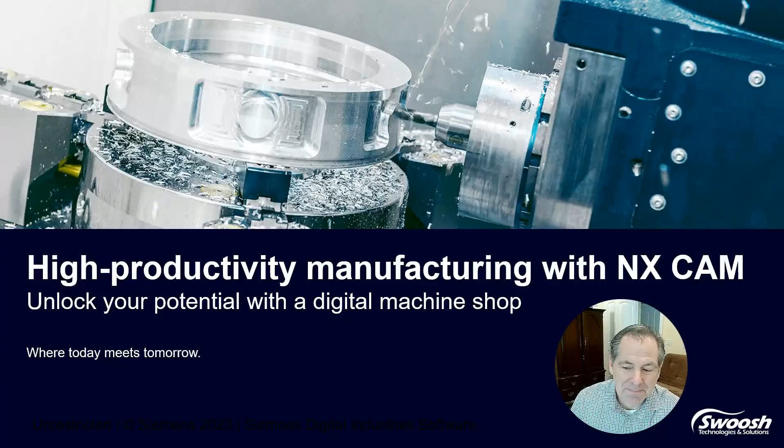So our agenda today is, we're going to cover CAM as your manufacturing platform. For those who already have NX CAM, some of it may not be new information, but my hope is that when John runs through some of the newer solutions on the platform itself, you're going to see, hey, that looks different. How can I leverage that? But we're going to cover three areas deeply today: probing, turning, and feature-based machining.

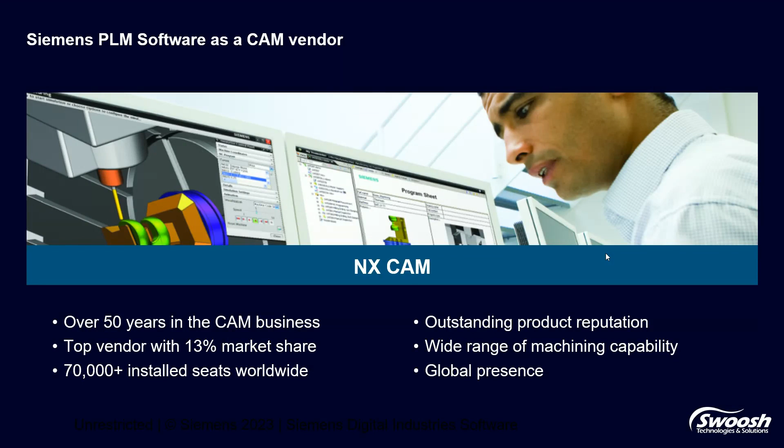That's where we're being pressed really hard by our clients today: how can we do more on the shop floor? So Siemens has been in the CAM business for 50 years, so they have a pretty big footprint worldwide. What do recognized consultants like CIMdata say about NX? One of the strongest product offerings in industry today. So with 13% of the market share, in a very segmented market, that's a really big footprint.

So areas where we excel, and when I say excel, I mean we are one of the leaders, for not only ease of use, but for speed, time of programming, and getting accurate information, the correct information the first time for the shop floor. So that's things that we will try to highlight today, but once again, everyone is trying to do more with less people, and sometimes the people don't have the same knowledge as other people. So how can I capture that? We're going to show you a little bit of that today on the feature-based.

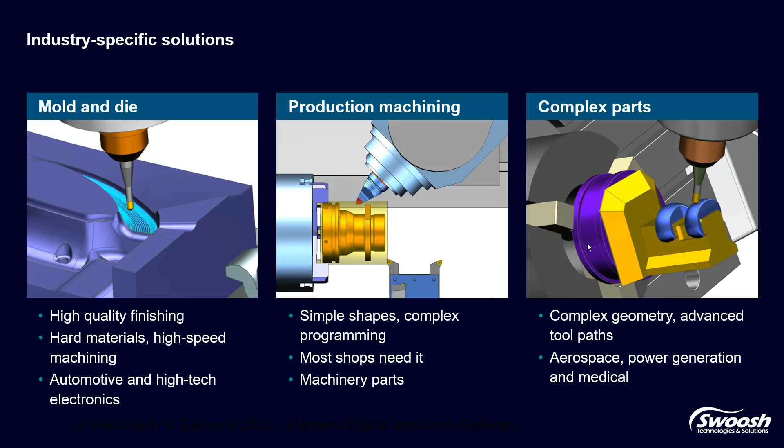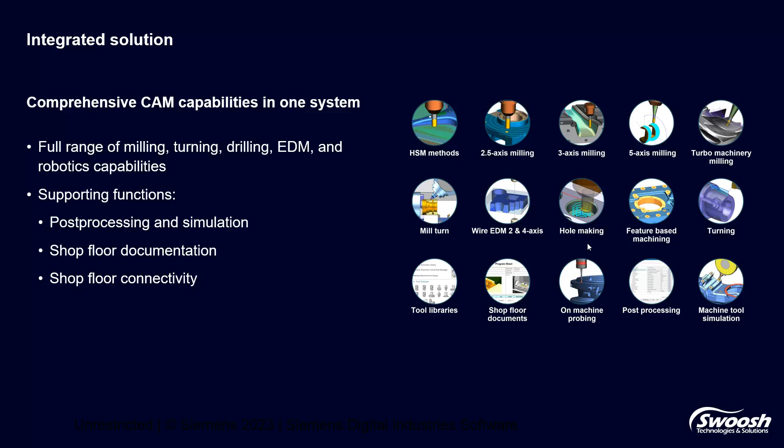So we are an integrated solution. We're not going to show you all these today, but it's not just fixed axis machining we have. We have a comprehensive solution from the post-processing, the simulation, on the shop floor. What information do the users and the operators see, and how can they communicate? So these are really areas that are critical for manufacturing today, the communication aspect of it.

Areas where we excel using some of our capabilities with NX CAM: anything with complex cutting, complex machines. This is where we actually coexist with a lot of other solutions where the other solutions can get it done, but it's a struggle, so they bring in NX CAM.

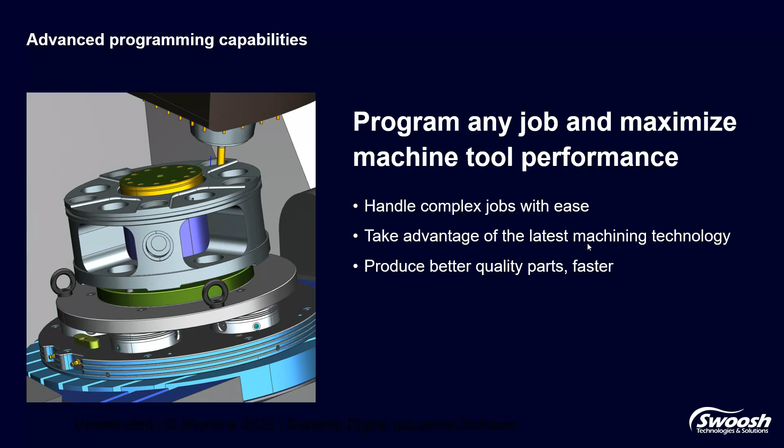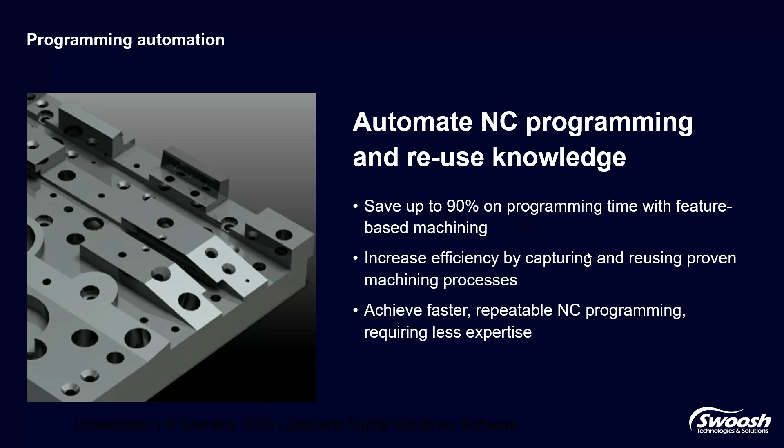Program automation. You're going to see this today. A lot of people talk about feature-based machining, but Siemens has taken it to a new level where it can capture best practices, where you can build in the knowledge of people who have been there for a while. How do you do things at your shop? So this is where Siemens can get crazy numbers, like 90% improvement on programming time based on their feature-based applications. Program automation further with PMI.

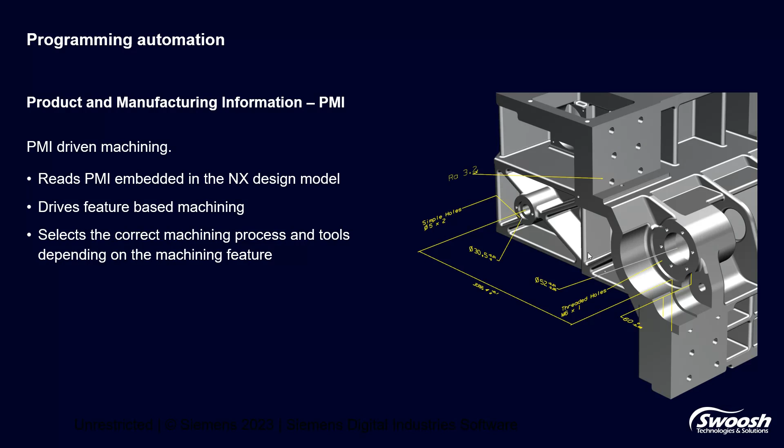So for those who do any kind of engine build or are in the supply chain with any kind of aerospace, you have seen PMI. It is only going to get more prevalent as the days go by. How do you leverage that in your process and your workflow? How can you capture that to program more accurately and more efficiently?

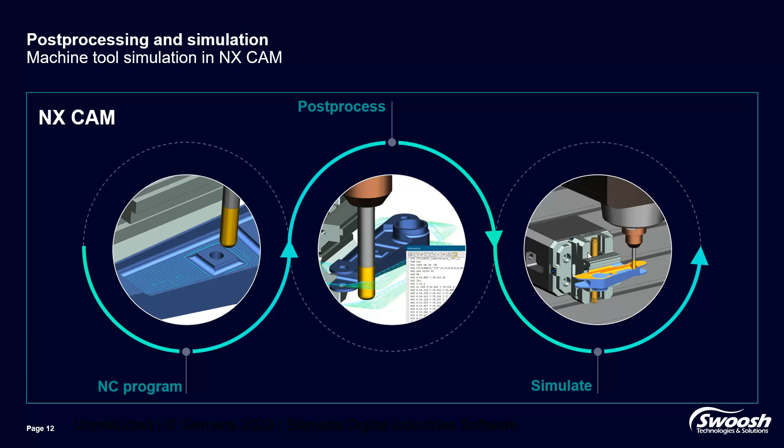Post-processing and simulation. We wouldn't be a comprehensive solution if we did not have a complete solution for communicating with the machine tool on the shop floor. So not only does Siemens simulate, we can also emulate. So we emulate with NX, and we can actually simulate with the machine controller itself, so you can do 100% virtual commissioning. What you see is what you get before you cut. You're going to know for certain.

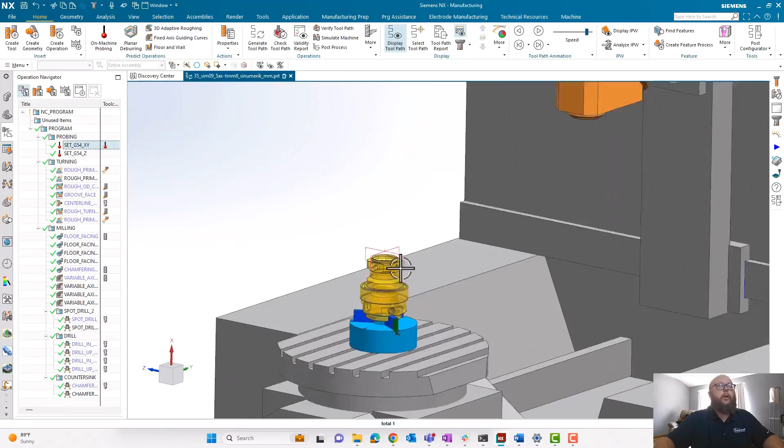Starting at the very top, we'll see that we have some probing operations. And in this case, it's nice to see that inside of NX, we can go ahead and probe our parts, in this case to set our work offsets. I could go ahead and display my IPW at any point in time and use the toolpath animation to view what our operation is going to be doing.

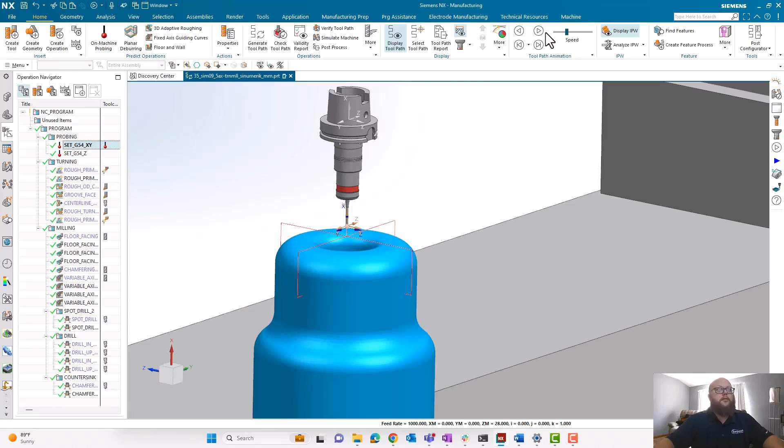In this case, I'm doing a 4-point probing operation of this boss feature. This is really going to set my X and Y location on my machine tool for this specific part, as well as—the next operation would simply be probing a Z position, again to set the location. So these values are going to set, in this case, our G54, which corresponds to the location I've set my G54 coordinate system in my geometry view.

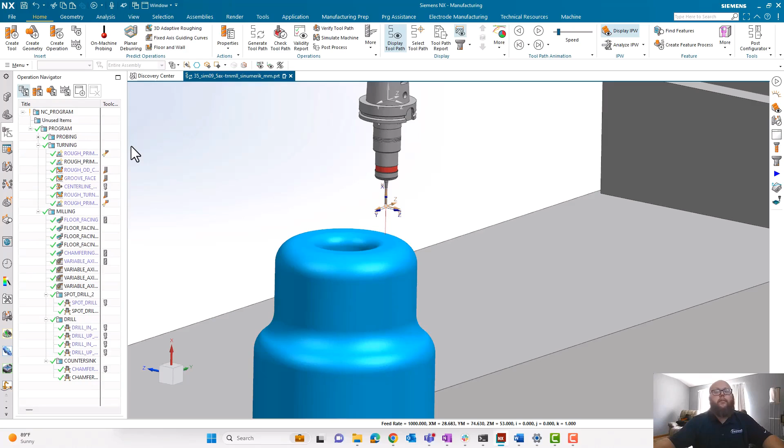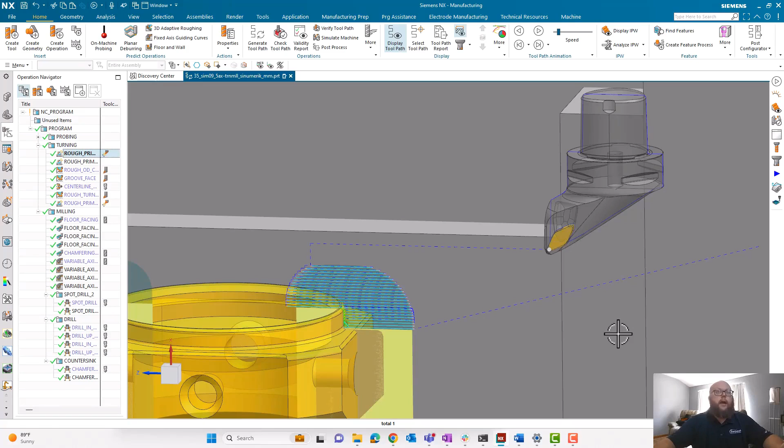Inside of turning, we support many different operation types. One of the newest is prime turning, a new tooling type and strategy used to really increase feed rates and material removal rates with the same machine tools you already have. NX can support the variety of prime turning inserts we have, both style A and B, across a variety of turning operations like facing, turning, boring, and so on.

We're also able to support point-to-point output and cycle output. If we look at a prime turning output, this operation is set to generate code in a point-to-point manner, so we'll see each and every line of code, a conventional way of programming. Some organizations like to use programming cycles or canned cycles instead.

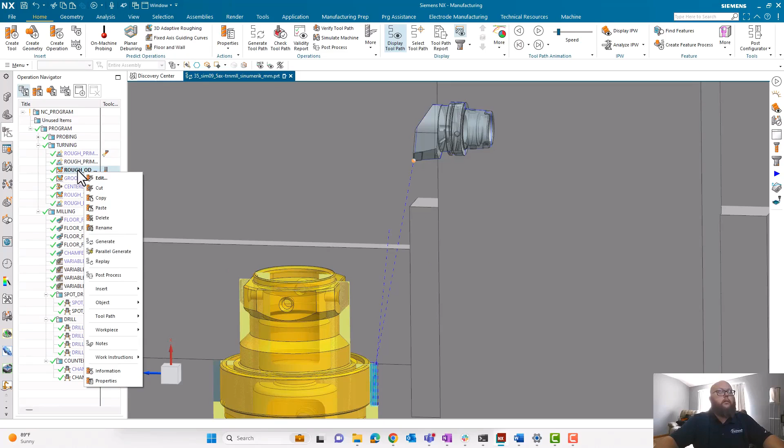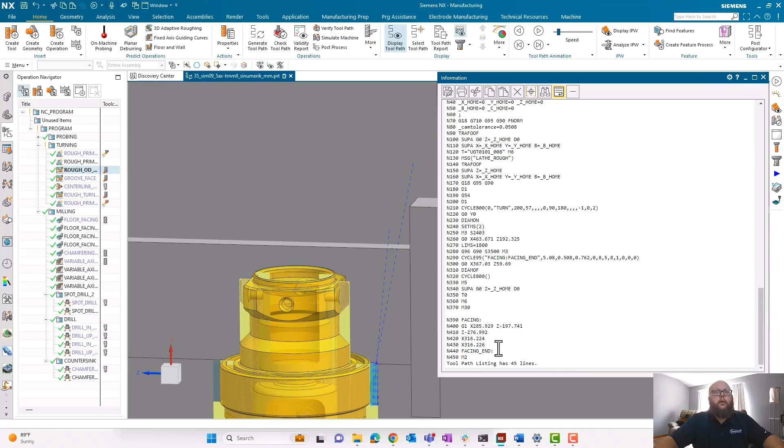A good example is this OD operation, where I'm using a machining cycle output type. When I post out my code, instead of having every line of code, we end up with a part profile being defined and a cycle calling this procedure. The machine control, based on parameters like depth of cut and stock allowances, determines how to cut the part. The important thing is we can support any method you want to see.

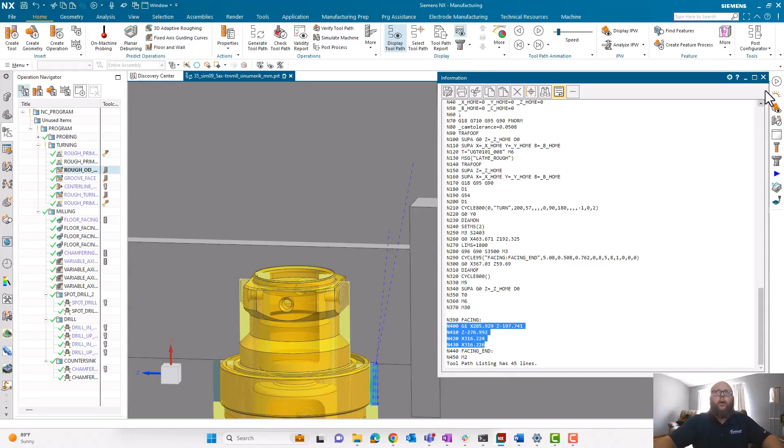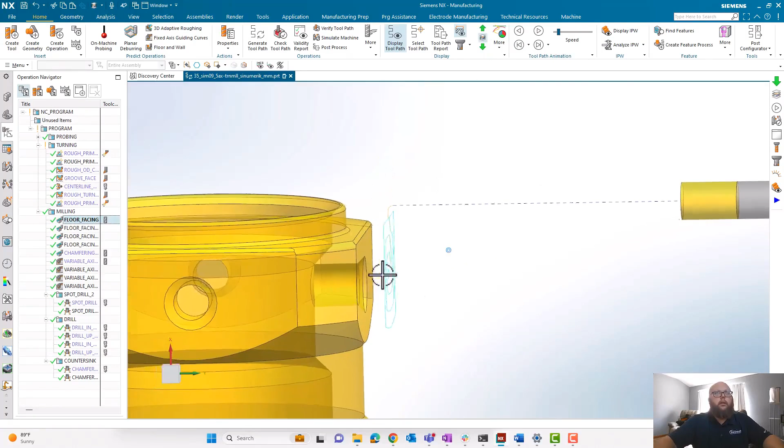Coming to our milling operations, we have planar milling, 3D milling, and multi-axis operations. We can see right in the graphic window that we can replay our toolpath with toolpath animation. In an operation like this floor facing, where we have multiple cut levels, we can choose to see the toolpath by level, so as I'm playing through, I'm only seeing the particular level I'm cutting, and as I move to the next depth of cut, the graphic updates along with the toolpath.

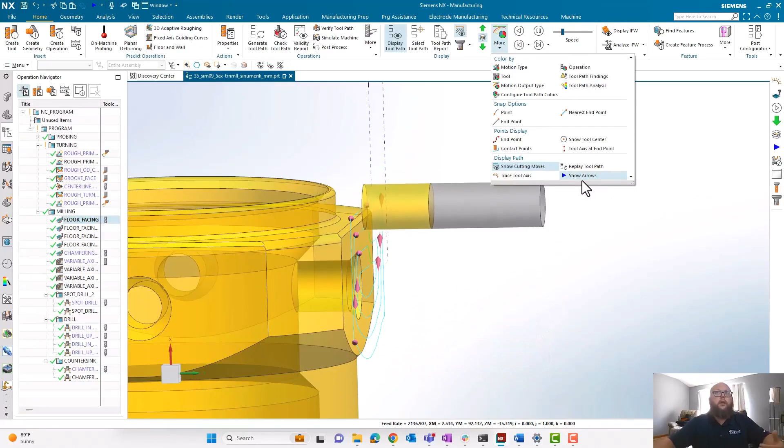We have a lot of flexibility in how we show our toolpaths. We can show arrowheads to quickly view the orientation or magnitude at which our tool is driving. We can also show things like tool trace or tool axis trace to get an idea, in multi-axis operations, of where the tool is going.

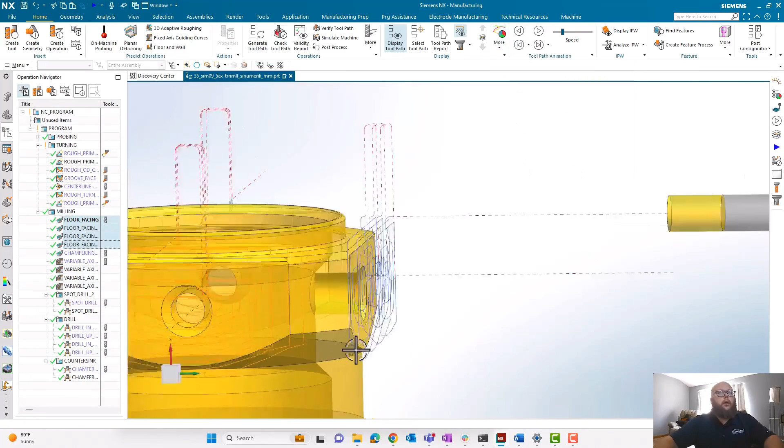We can also look at other ways to get a good understanding as we select multiple operations—how do we want to view our toolpaths? Maybe I'll choose by operation, and you can see each operation's toolpath color has changed to signify graphically that we're looking at various operations. So there's a lot of flexibility in the system to see things in the manner that makes the most sense to you.

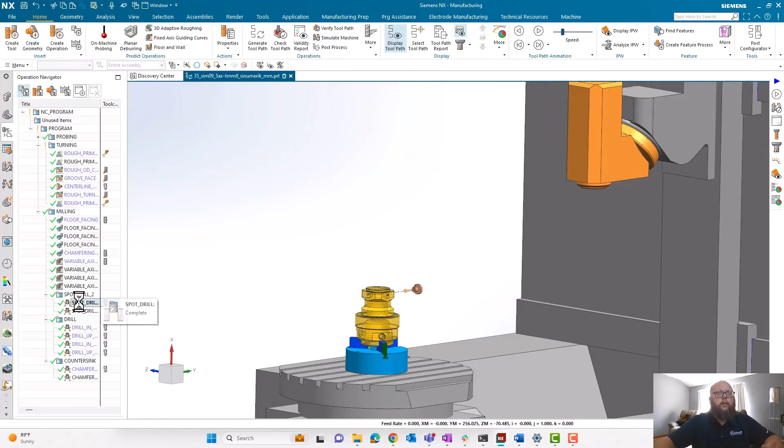Lastly, we have some drilling and hole-making type operations that have been created with feature-based machining. We'll take a look at some of these details a little bit later on.

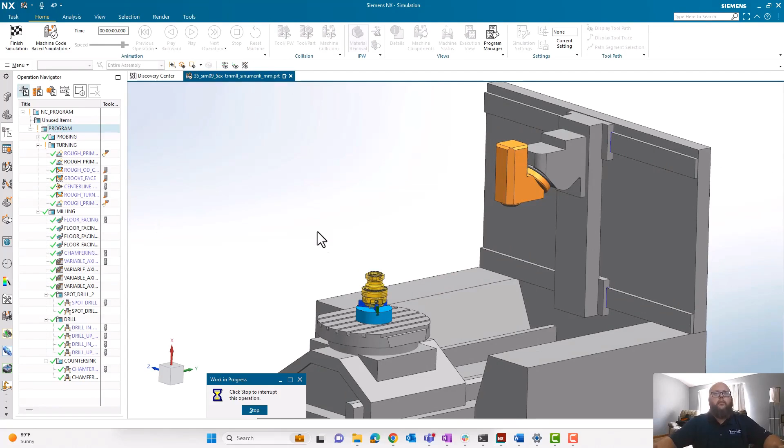We're going to do a more granular look at some of these different operation types, the look and feel from an operator or CNC programmer perspective. But in the end, we're going to run a simulation to verify that everything we've programmed will produce the part we want and be safe out at the machine tool, achieving first-time-right production.

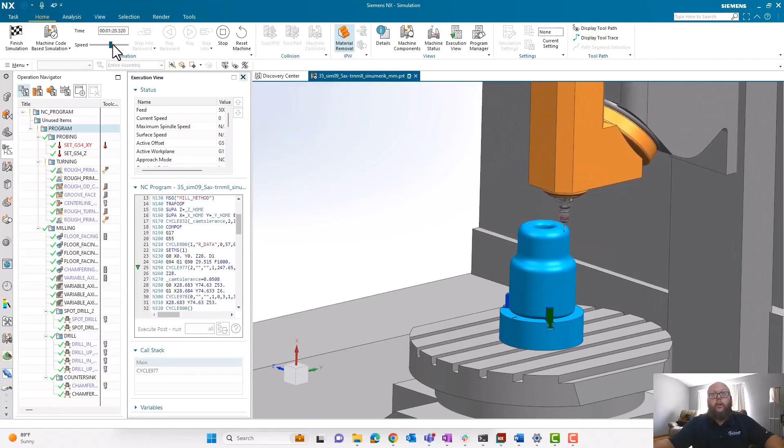As we run simulation, we can simulate all of our probing operations, turning operations, milling, and drilling operations, and we can do that all inside one environment. That's really important—we're not switching between different software packages or modules, we're doing everything in one environment. It's really a benefit to the programmer: one, to reduce the chance of errors, and two, for time savings, not having to manage data and information across multiple platforms.

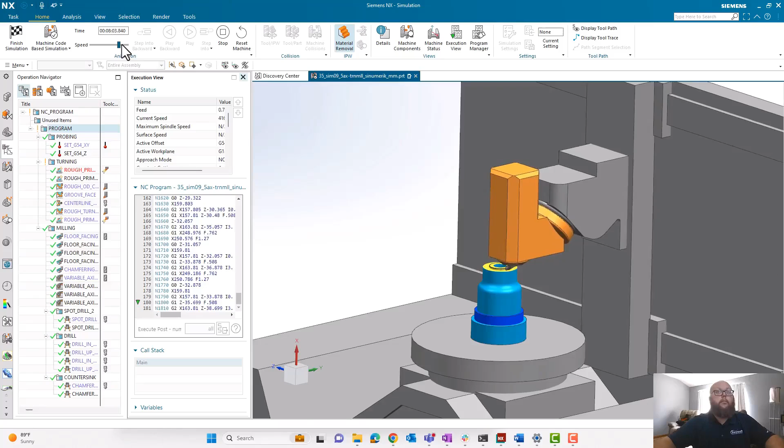In NX, we're very intelligent in identifying what type of operation we're using. Our post-processor doesn't need any manual intervention to specify turning output, milling output, or 5-axis output versus positional output—it looks at the operation type, tooling types, and method types, and obtains all this information automatically. That leaves very few decisions or repetitive actions for programmers on a day-to-day basis, and again, this just increases our throughput.

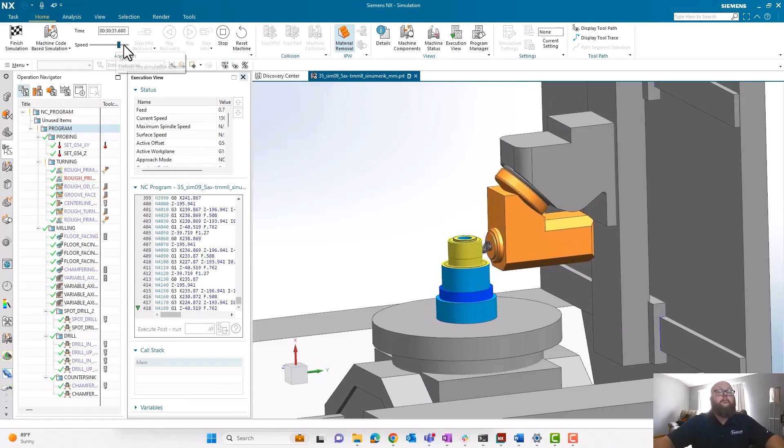As we finished up our turning, we'll come and look at our milling operations. In this case, you'll see that we're even using a right-angled head. So we can support any number of combinations of head attachments, facing heads, multi-axis heads, to be defined and used and programmed inside of NX CAM. So whatever your situation is with your type of machine tools and accessories you have, all can be supported inside of NX CAM.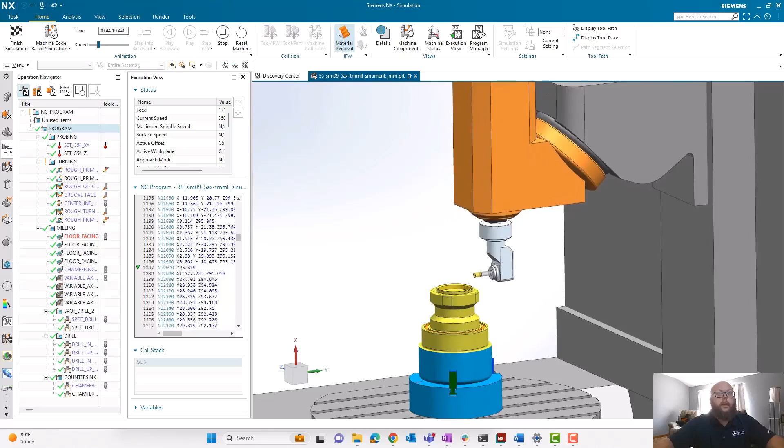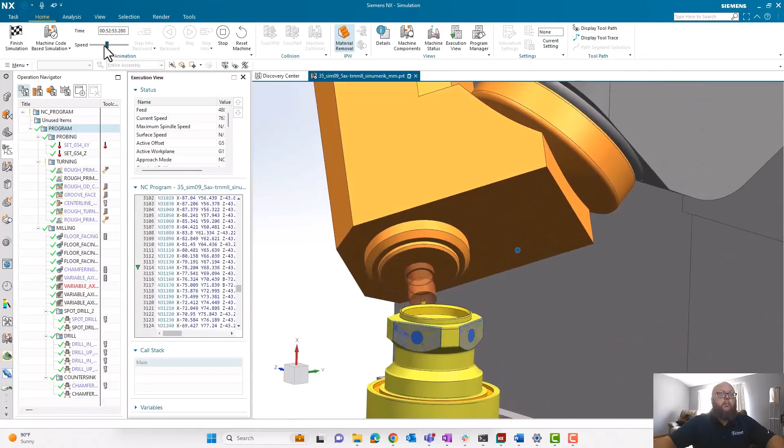And here we'll see that we have some multi-axis operations now. The great thing about NX is when we use a multi-axis operation, everything's automatically defined, based upon our machine tool definition and limits. We're always going to be machining the accessible regions of our part, without any manual intervention to obtain these results.

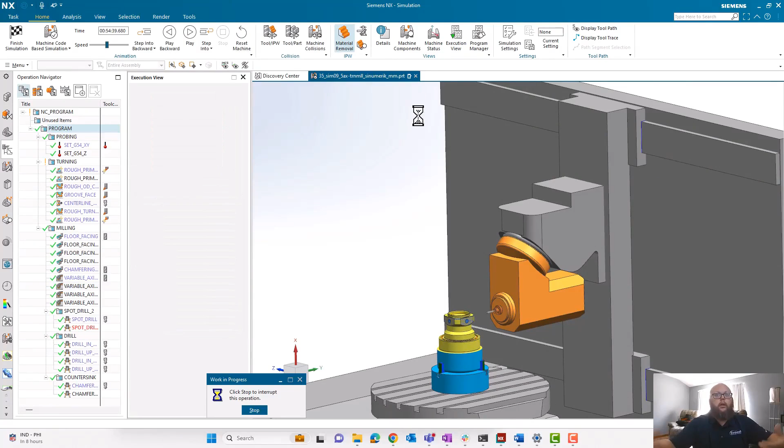We can also stop at any point in time and do an analysis on our IPW. NX always keeps up to date with the actual current stock condition, our in-process workpiece. As I zoom in on my part, I can use this heat map to really understand how much material has been removed or remains on our part file.

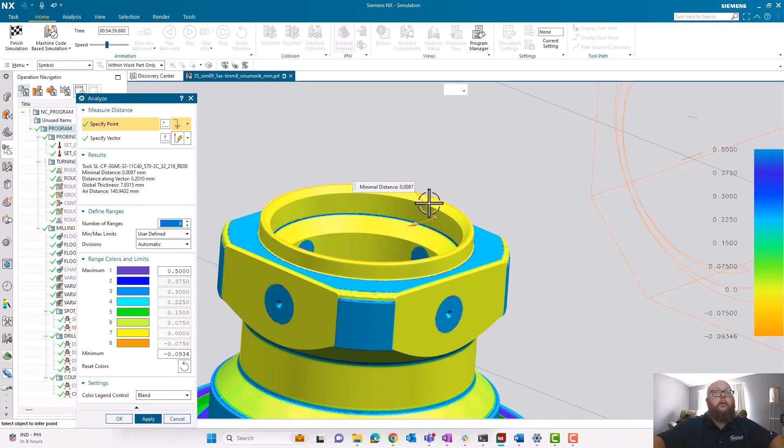So as I check any given surface, I can see how much material is remaining, perhaps how much material is left inside of corner radiuses. Maybe our tool that we used was larger than the actual desired feature. Great way to catch this type of information and see that we have more work to do on our part, and certainly not allow it to get out to the shop floor before it's done inside of our program.

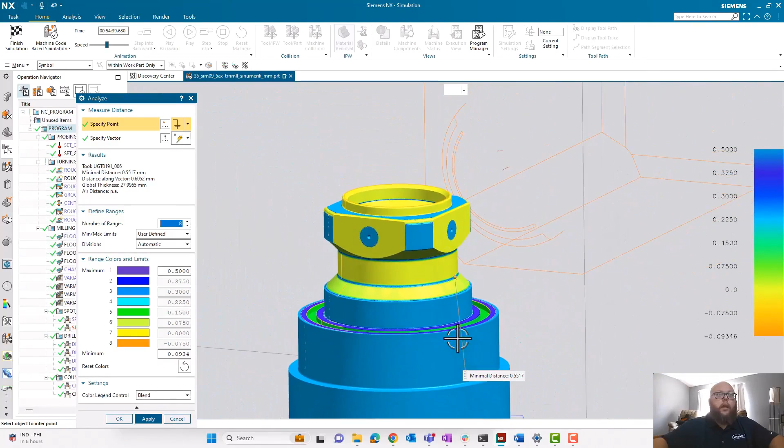Once you've completed your machine simulation, it's time to go ahead and post out that code and send it out to the shop. So we'll come down to our post-process dialog, and we'll see with our machine tool set up in our environment, we're limited to post to the appropriate machine that this job was programmed for.

So once we go ahead and run the post processor, this code is going to be ready to go out to the shop floor, and we know that it's going to be error-free and produce a good part the first time through.

All right, with our post run complete, we can go through, take a quick look at any of our code, make sure it all looks good, and we can go ahead and send this out to the shop floor now.

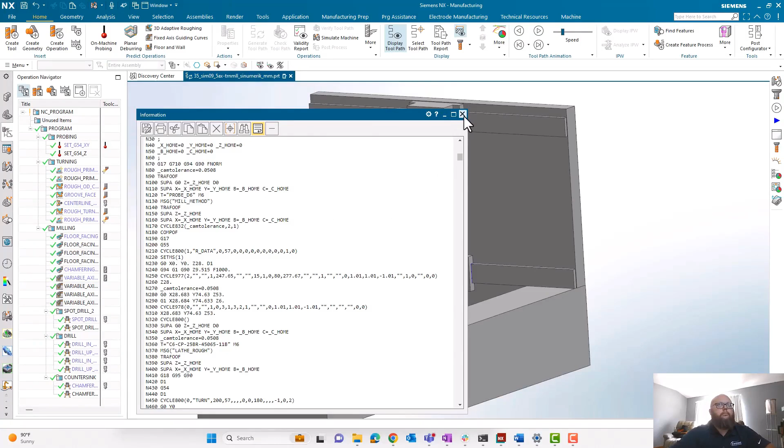So next we're going to take a little bit of a deeper dive into some of these topics for probing, turning, and milling operations. Next up is going to be probing.

Okay, please hold one second. We're pulling up the next video. Of course, this worked perfect when we were testing it.

So what John just showed too was kind of a lot of it put together, and we were going to... Oh, it looks like Alex. All right, we're going to go ahead and take a look at on-machine probing in a little bit more depth here.

So starting with NX 2306, which is the version I'm working in here today, we have some new operations for on-machine probing. So to go ahead and kick this off, under the probing type, our new option is called on-machine probing. We always had mill part probing and turn part probing.

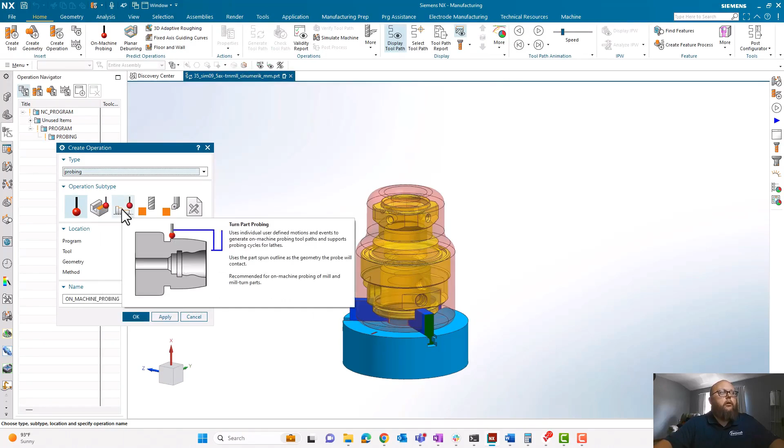On-machine probing is a whole new approach to how we are handling on-machine probing, and I'm going to show you a little bit about the functionality.

So in this case, I'm going to go ahead and select my probe. I have a 6mm probe in my machine, my geometry group, method group, and go ahead and say OK.

Now, this on-machine probing dialog is really agnostic to what type of machine control you have, whether it's Siemens, Heidenhain, or getting into Fanuc, Okuma, things like that. Currently, Siemens and Heidenhain is supported, their cycle types.

And we'll see that as I pick geometry under my specified probing geometry, as I start picking some geometry, I have different cycle types that are available to me. In my case, I have a Siemens controlled machine loaded. I'm only going to see the Siemens cycles here.

So the benefit to this, as opposed to some past practices where you needed to know as a programmer the specific cycles that you want to run, or that I need to know what a bore cycle is versus a boss cycle versus a single point—I don't need to know that any longer, because that information is going to be presented to me based upon my geometry selections.

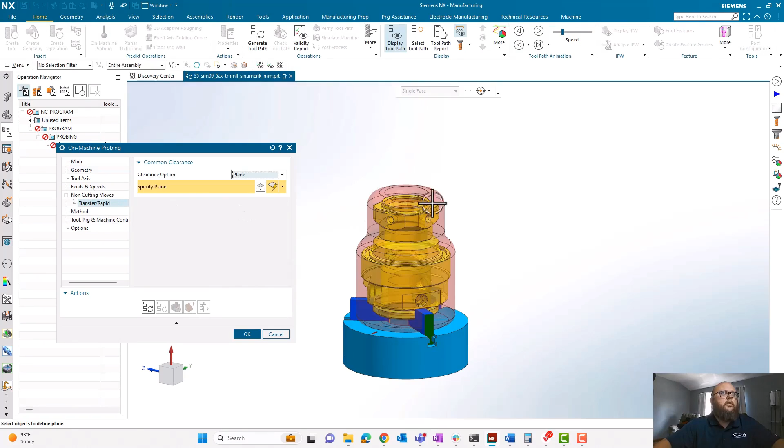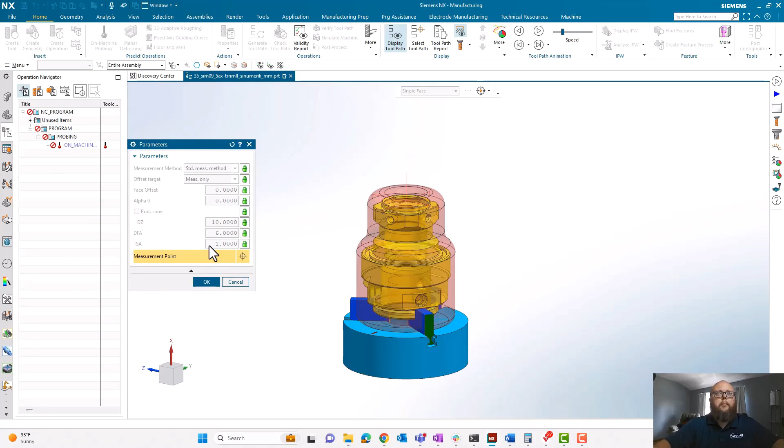And I'll pick my cycle 977 for my spigot. In this operation, we can change or set all the parameters for a probing cycle that's going to be a one-to-one match of what's on the actual machine control. So if I want to specify the height of my probing, I can simply just pick on my part geometry, and the cycle is going to update.

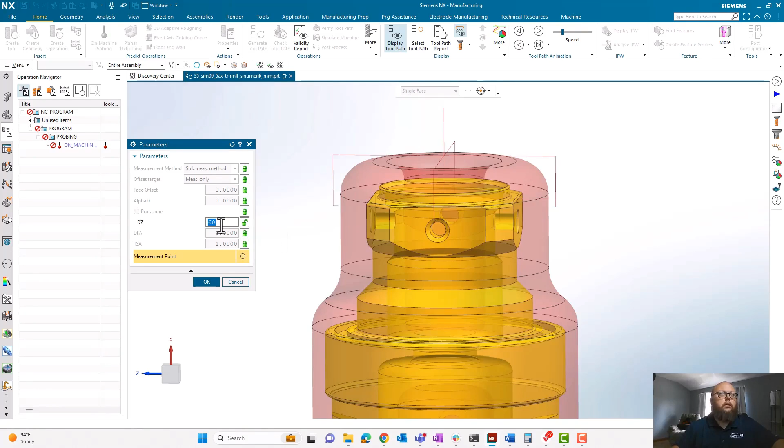Now we can see here that our clearance plane is incorrect for what we need. So let's go ahead and make some changes to our clearance plane cycle. You can easily see as we're changing the settings, our toolpath is updating right away.

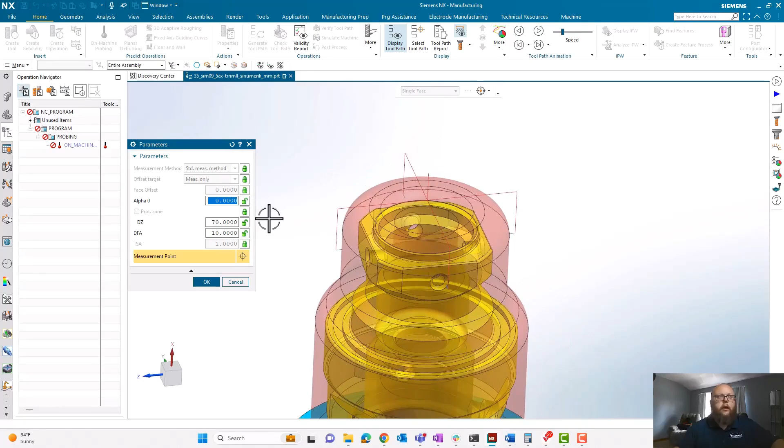If we continue with our different settings, we can go ahead and influence the toolpath even more. So everything you can do on the machine tool with the cycles, you could do here inside of NX. Even in this instance, just changing the clock position of where we're starting. And that's it. That's as easy as it is to program some of these operations.

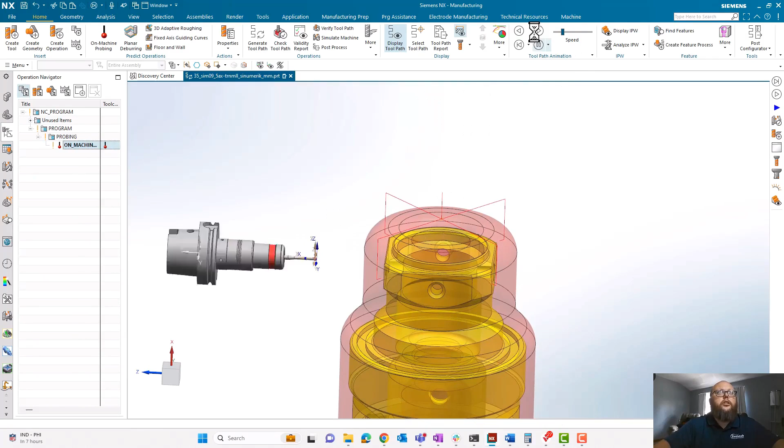So let's go ahead and generate that, make sure everything's good to go. We can go ahead and verify right inside of this operation what the toolpath looks like. And we can see that we are driving the actual toolpath that's going to happen.

The old probing operations, you couldn't do this. Essentially, you saw where the probe was going to go, the events triggered in the post, but we didn't see specifically the actions that were taking place inside of the GUI here.

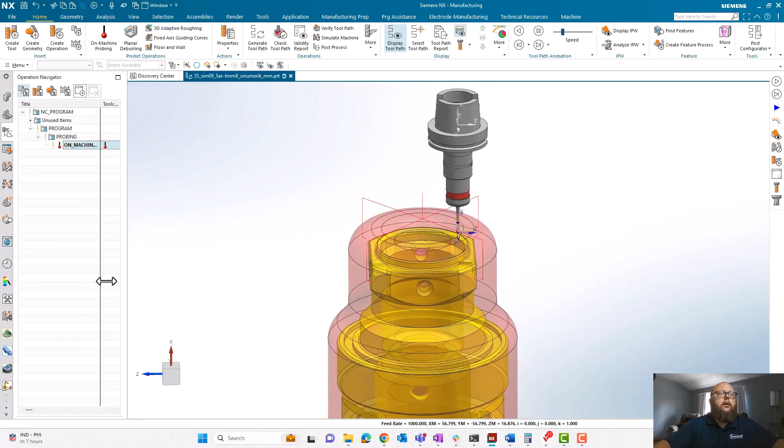We also support post layers and CSE support, the common simulation engine for simulation. Again, let me go ahead and activate my machine tool, and we'll be able to see that right away I'm able to go ahead and post-process my machine cycle code for the machine.

And we'll have full support of this for simulation as well. So here we'll see the result of our probing cycle on this Sinumerik controller, as well as if we were going to do some simulation, we would actually be driving the machine cycles just like the real machine would do.

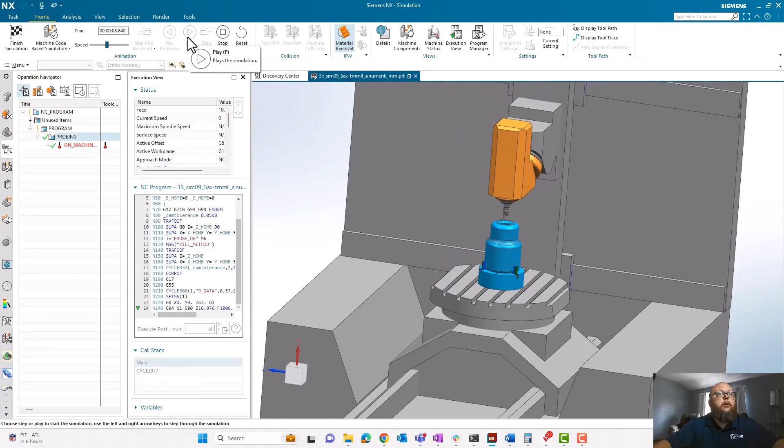Pretty great to be able to do this all right inside of your CAM system.

All right, up next, we'll talk a little bit more about turning.

All right, now that we have our work coordinate set with our probing operations, we can go ahead and look at our initial turning operations that we want to complete. So generally in NX, we're always working with 3D models, but in the case of turning, we really want to work with a 2D cross-section.

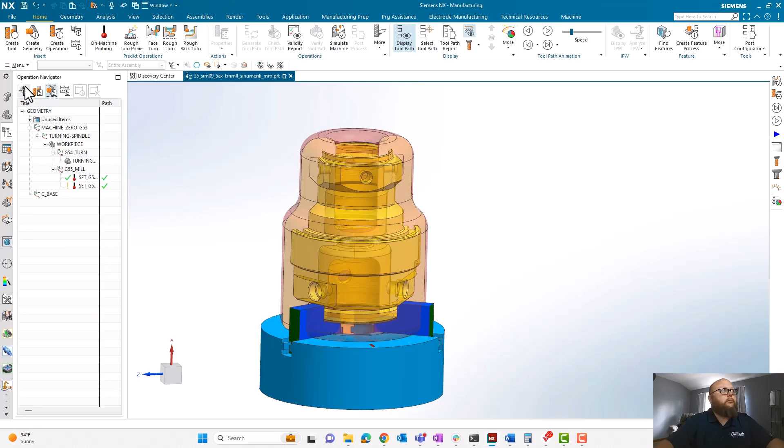If I look at my geometry view here, I have what's called a turning workpiece. And turning workpiece looks at the parent objects, in this case my 3D model of my part and 3D model of my blank geometry, and creates revolved cross-sections of that geometry. If I go ahead and suppress my blank and part, we can see that resultant geometry in the graphic window now. This will allow me to go ahead and create my turning operations.

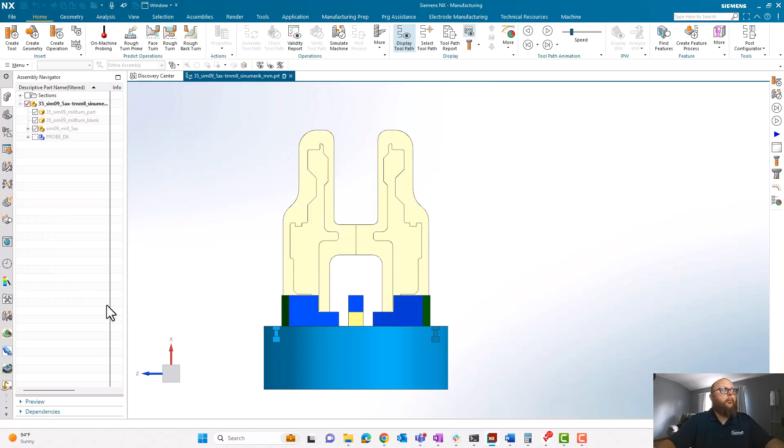In this case, I'll start with a rough turn prime operation. And I'll go ahead and specify my geometry groups and method groups appropriately. So in turning, things work slightly different than milling operations, where we're selecting faces or regions of cut area and wall geometry.

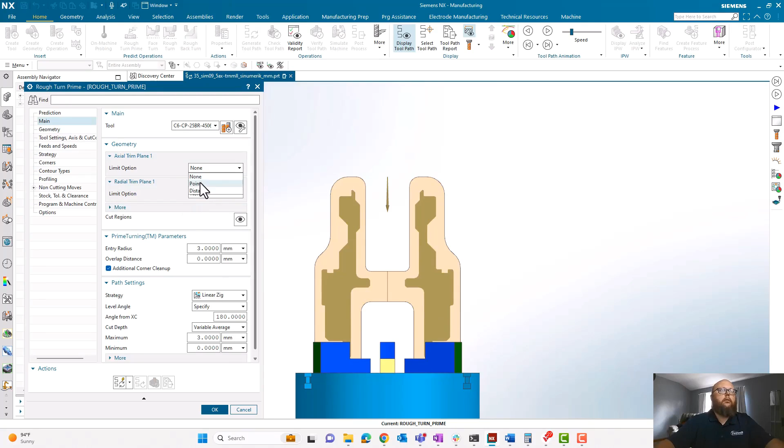Inside of turning, we're working with containment. Essentially, we're identifying regions of the part that we want to manufacture. So in this case, I'm going to start with an axial trim plane, picking some geometry on our part, and we can see right away I'm getting some toolpaths that are going to be generated automatically with my selections.

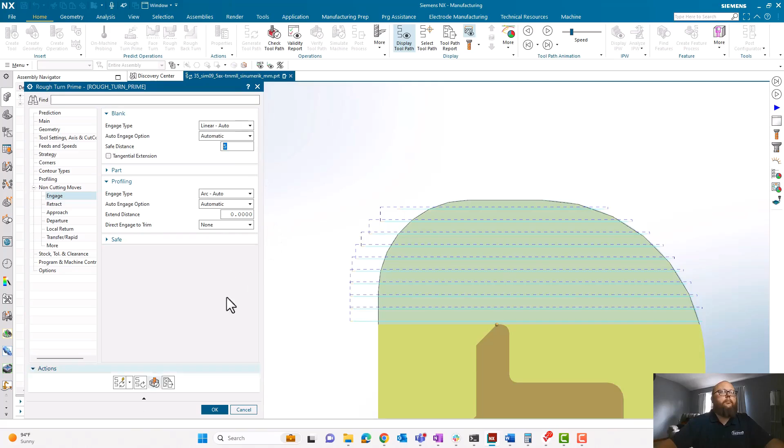We can change things like cut direction. How do we really want to have this part be cut? Maybe I want to change some non-cutting engages, retracts, things like that. I think we'll give it some extensions here. So, quite easy to create some turning geometry.

And when we play through and look at this, we can view our toolpath by just looking at the insert, looking at 3D model. In this case, in prime turning, we're really cutting the wrong direction right now. We want to be cutting, leading with what is traditionally thought of as the backside of the insert.

So right inside of our operation, we just go ahead and flip that tool around the holder. On a mill turn machine, that's really easy for us to go ahead and do.

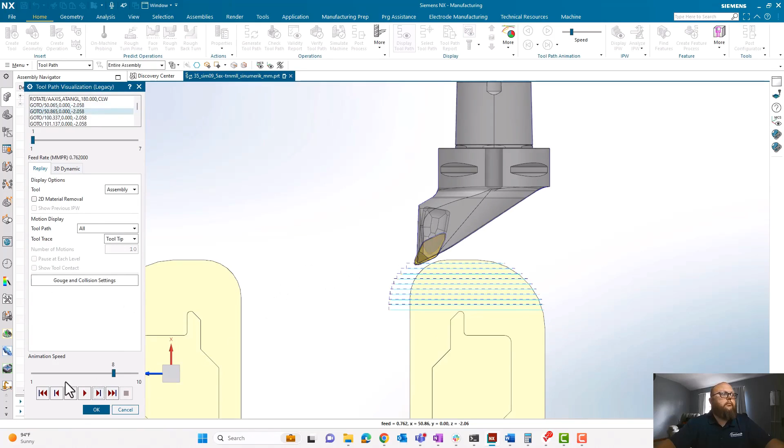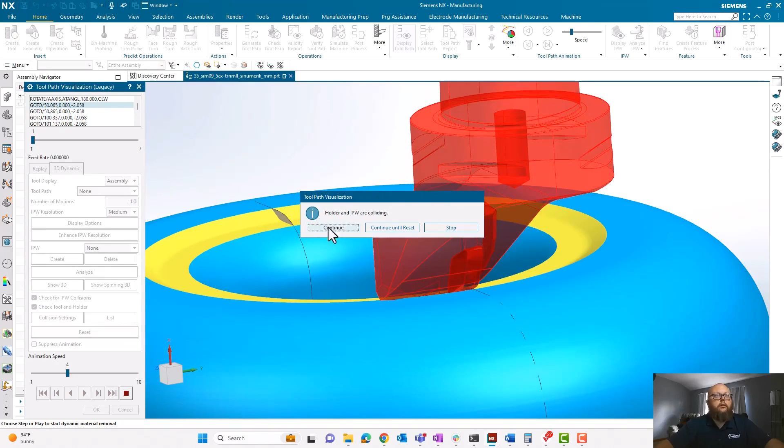And so as we want to go ahead and play this through, we can take a look and see that we're actually colliding. We're getting IPW collision information while we're not even inside a simulation. We're checking against our IPW right here in our regular programming environment. So that's a great enhancement that we're able to really review that IPW information.

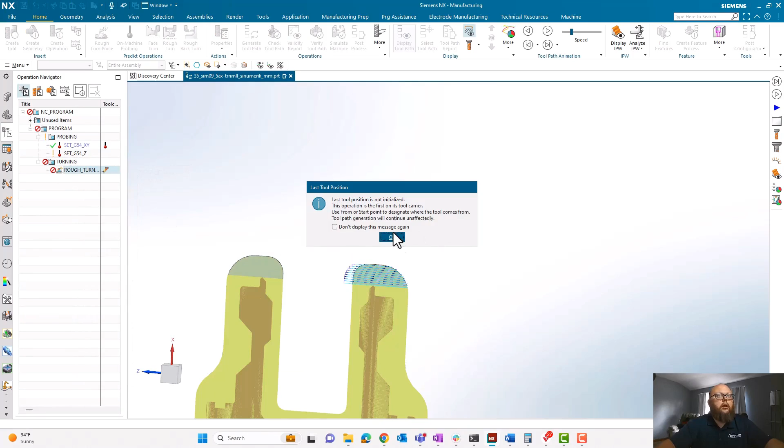We can always go through in our operation and reuse this information. So I just did a rough face of this part. Let's go ahead and just regenerate that real quick. And I can just go ahead and copy and paste this operation. And utilizing the same tool, I can now do some turning of this part.

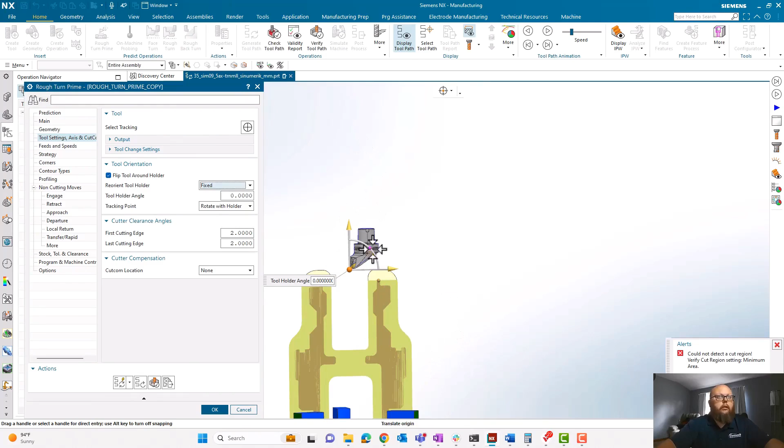And what that might require for this particular machine is for me to reorient the tool holder. I no longer want the tool to be vertical, I want it to be more of a horizontal orientation. Come and just reorient this tool. And now we can take a peek and see what our containments look like.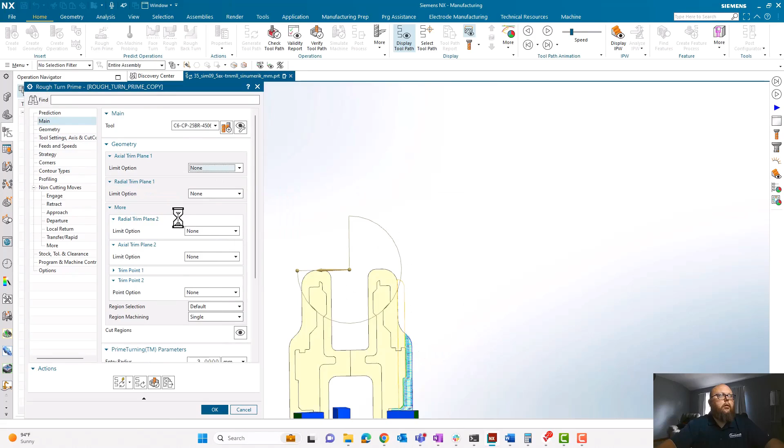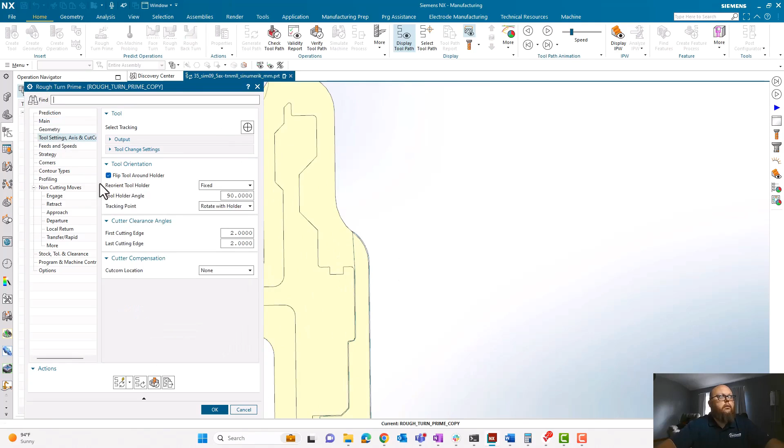I'm going to make a couple changes. I really want to change some of the regions that I'm going to be trying to cut here, some of the different aspects of it. And so now we can see that with our current containment, we can access some specific areas of our part. And this is always intelligent that if we're changing our settings, here now I checked flip tool around holder, change the orientation of the tool, I can see more geometry here.

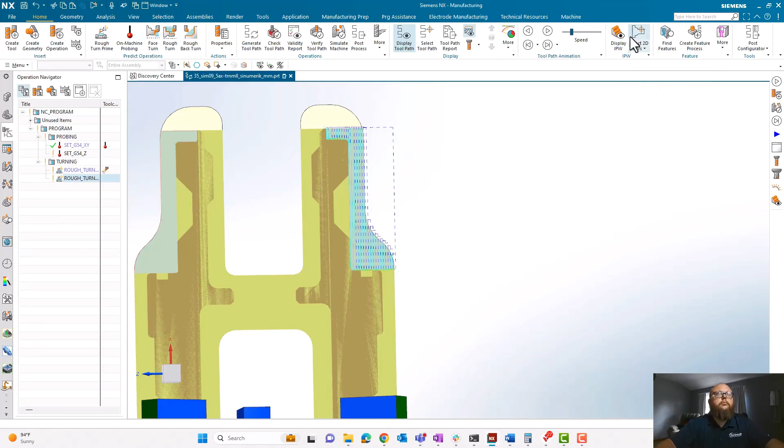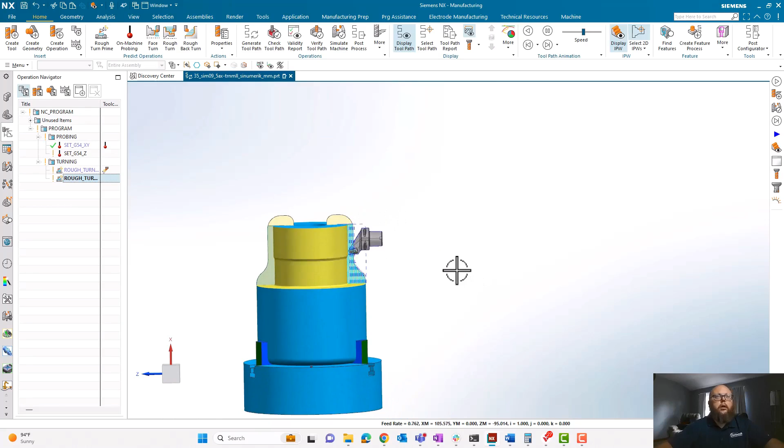So maybe I don't want to cut all of this in one pass, so let's go ahead and apply some more containment to this part, and we can see how quickly our tool paths are created here inside of the turning environment. So there you can see how quickly it can be to create your turning operations. Next up, we're going to look at a little bit more information about drilling.

And the last topic we're going to talk about here today is, we're talking about drilling, but really what we're going to do is use some feature-based machining. So feature-based machining is an approach that allows you to find features, group features, and manufacture features, all based on a set of rules. So there's a number of out-of-the-box rules that come with NX. However, you can also create your own rules if you'd like to go through and embed your company's practices or policies inside of your software.

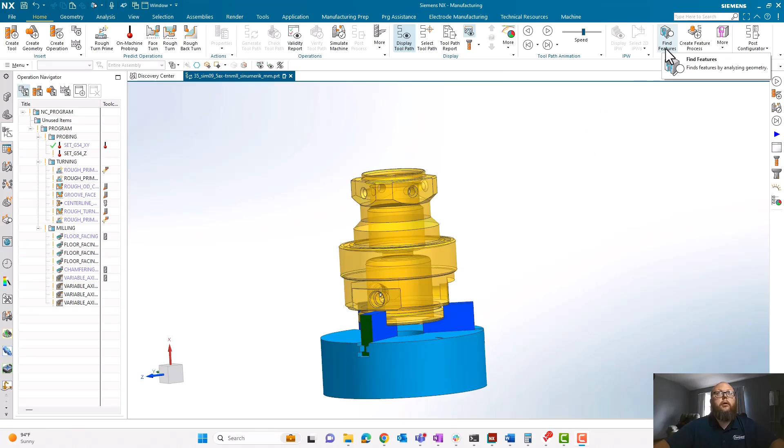So let's just take a look at a little bit of what goes into feature-based machining. So the first step is really finding some features. So up here on my ribbon bar, I'm going to go ahead and click on Find Features. And we can see under parametric features, there's a good number of different types of geometry, and we can drill down into each of these to find different types of geometry. These are all the out-of-the-box feature types that can be found.

For the sake of this demonstration, I want to focus just on our step features. Step features are really hole features. One-step hole, two-step hole, three-step holes. Those correspond to like through holes is a one-step hole. Counterbore hole is a two-step hole. You have two different diameters, two steps. That's the terminology that's used.

I can also limit my area. So I'm gonna look at all the different types of stepped holes here. But I'm also going to limit my search. I really want to focus on the top half of my part. So maybe for my instance, I'll just window around and roughly select that top half. Once I have those selections made, I can go ahead and choose the Find Features icon.

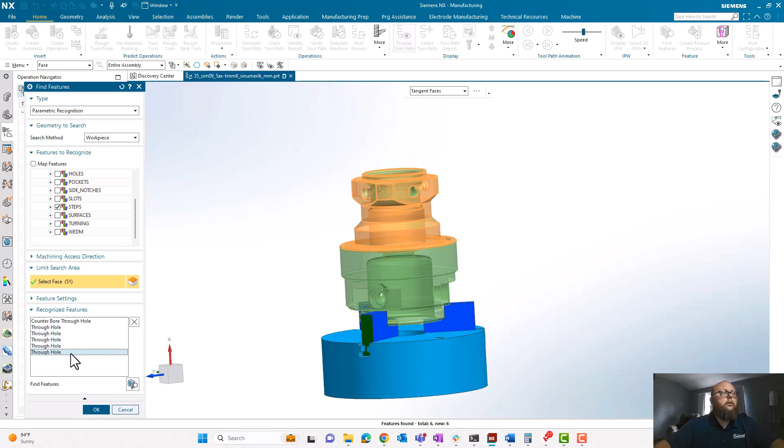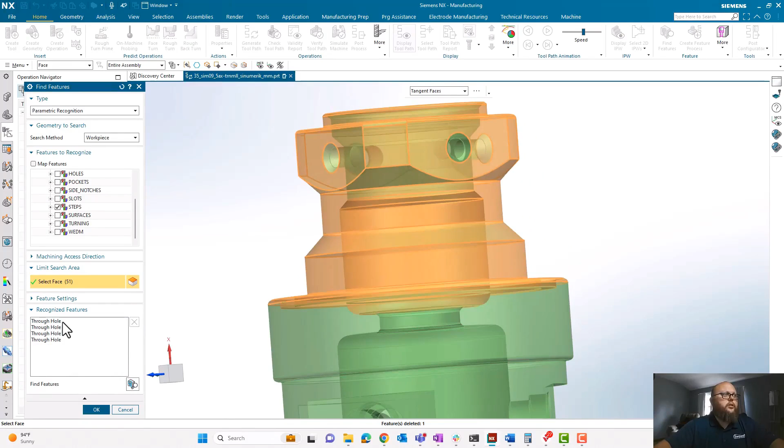So now NX goes through and it's found a number of different features. And we can see that in this case, we found a counterbore through hole. That's not really what I want to do. This was already handled with turning. So let's remove that. And then I have some different through holes. I have one down here in the center, same thing. We did that with the turning operations. And now here we have the 4 holes that we see around the periphery of this flange. That's good, that's what I want to focus on. I'll go ahead and say okay.

So what do we do here? Under our machining feature navigator, if we expand this, we'll see that 4 holes now exist. The same actions would happen had I created a drilling operation and manually selected each hole. These features would have still gotten created here in the machining feature navigator. We just did this a bit more proactively.

And we have some out-of-the-box rules that exist here. I'm just going to go ahead and turn all of them on. And I can choose things like geometry location. Where do I want this to be part of? I know for my case, I want this to belong to the G55 mill group. So I'll go ahead and make that setting.

I also have the ability to use existing groups or create new groups. In this case, I'll use always create new. And now here, I'll say OK. NX is going to go ahead and look at the feature-based machining database and look at the features that it's found and find the proper tooling and operations to go ahead and produce those features.

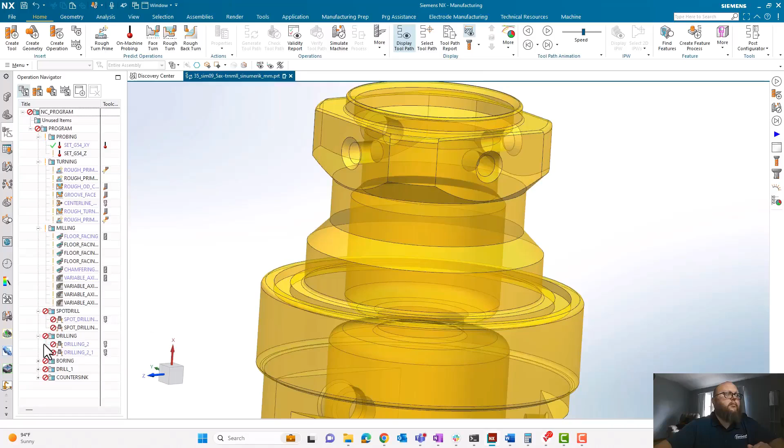All right. So it's done thinking. We can move over to our operation navigator again, and we'll see that operations have been created for us. So let's go ahead and generate some of these operations. Here you can see that using feature-based machining, our spot drilling operations are created. These are our drilling operations.

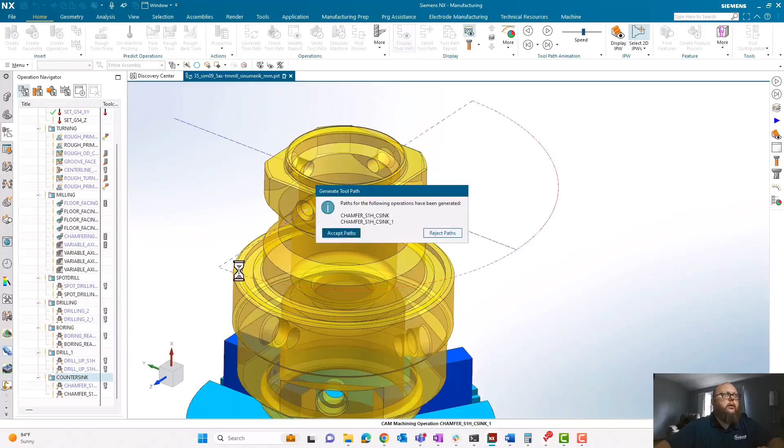Saw that we also needed to do some boring operations. And countersink. Some of these look a little bit redundant to me. Again, these are basic out-of-the-box rules that may or may not apply to you. I don't really want to do any boring things like that, so I'm going to go ahead and delete some of these operations. But now quickly, I have my operations for spot drilling and countersinking.

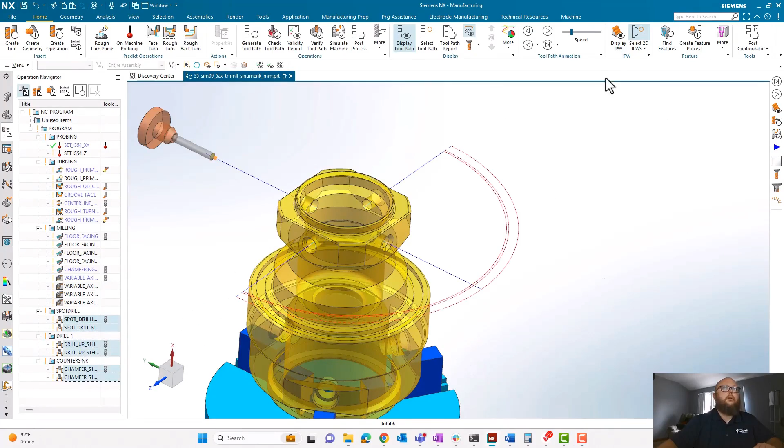Let's go ahead and take a look at the results. Here, we've generated our IPW. And we can go around and see that we're going to spot our holes as expected, followed by our drilling operation. And finally, our countersinking operation.

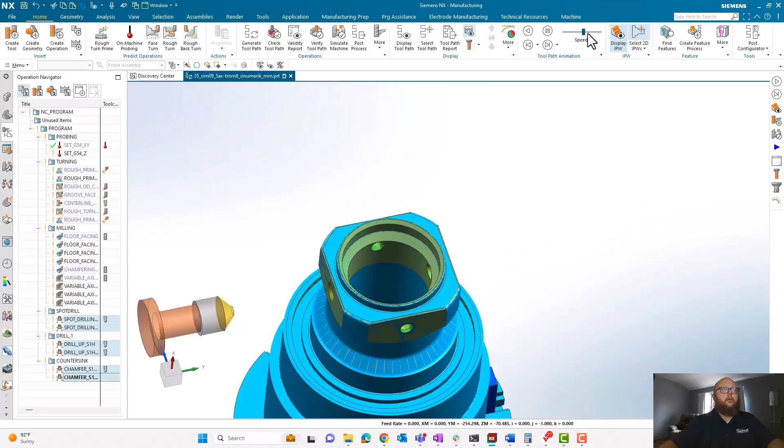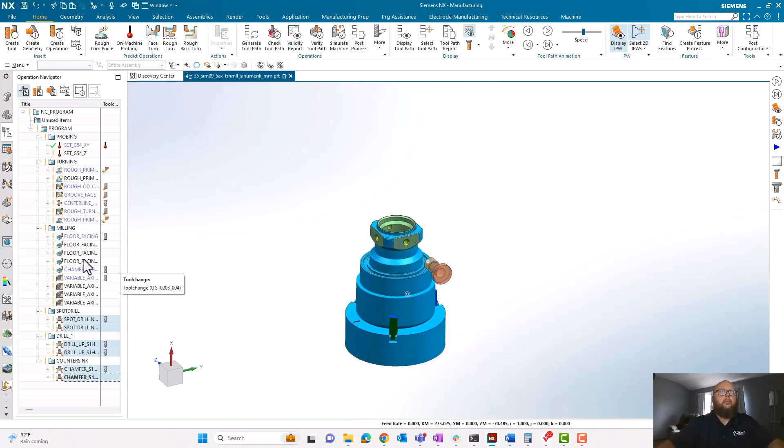So very quickly, with feature-based machining, we can program a good number of features. You can see this was only 4 holes on this part, but we could have done the same process with many more holes and different size and type of holes. So feature-based machining is a great way to look at improving your programming efficiencies. All right, and with that, we've kind of shown an end-to-end process of NX CAM and how flexible it can be in a number of different environments and applications.

Okay, let me get my part here going again. All right, so I hope that was beneficial for everybody, what you saw today. All right, you can't hear me. I'm having a technical difficulty here, so. You sound good, Dan. Oh, good. Okay, great. Let me get back on. Sorry, I thought I was muted. My error here. All right, doing live. I'm a little rusty, so we're using a new tool here.

But John, thank you very much. That was very informative. I recognized a few names there, so I sent a few chats out. But by all means, we're here to help explain if there's some new features there you're struggling with. You already have them, but maybe how to approach or use it. We can definitely walk through those techniques and workflows. Some of the areas we didn't cover, there's a lot, and we have some more follow-on webinars here, and maybe in the survey, you can give us some ideas too.

That would be great. There's so many tools within NX that just don't get touched. I compare it to something like Outlook or Word, where we maybe use 10% of it. So that's our job, to help explain it to you and show you what will work best for your shop. Some of the areas we definitely didn't touch were all of these communication tools about shop floor process planning, getting NC code out to the shop. How do I make updates or changes? Once again, the communication has become so critical, even more complex today.